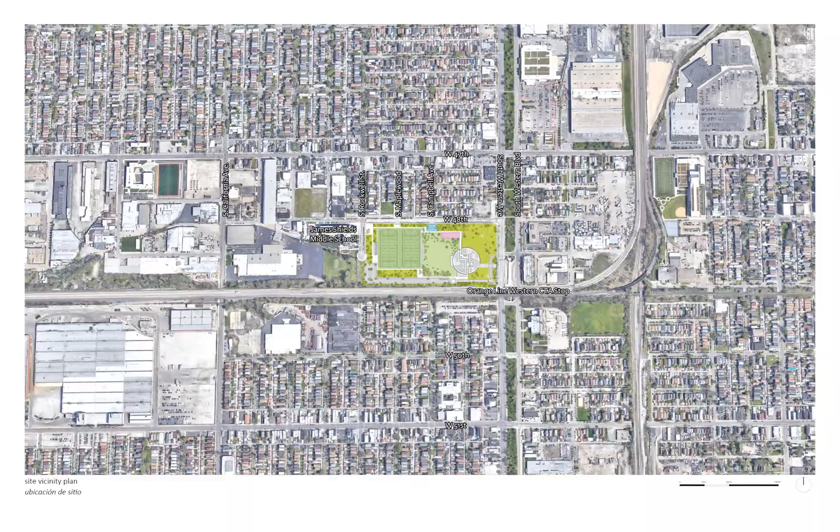Currently, the Brighton Park community area is one of the top 5 community areas underserved by public open space. The new park repurposes a 17-acre vacant former industrial site into a new community open space. The large site makes it possible to provide significant indoor and outdoor recreation assets for people of all ages and abilities.

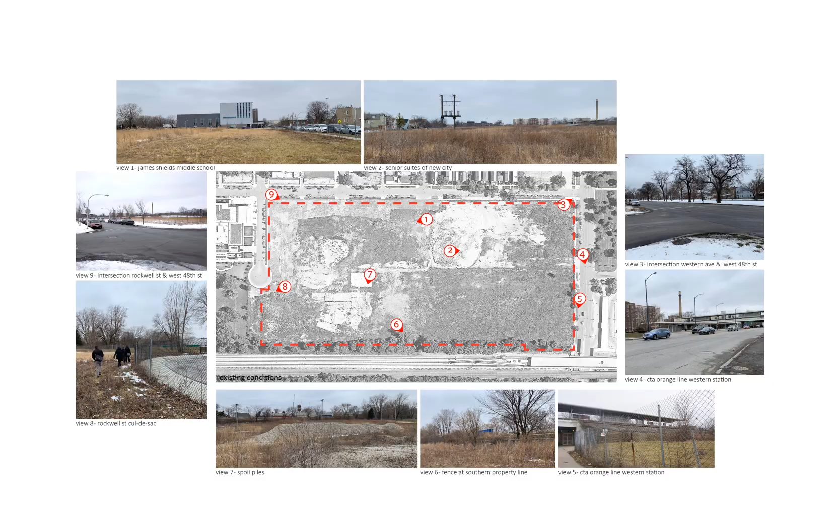Park 596 is located along the Chicago Park and Boulevard system, a network of major parks connected by green boulevards. Our site is marked here in red, positioned along a segment of the Western Avenue Boulevard between McKinley Park to the north and Gage Park to the south.

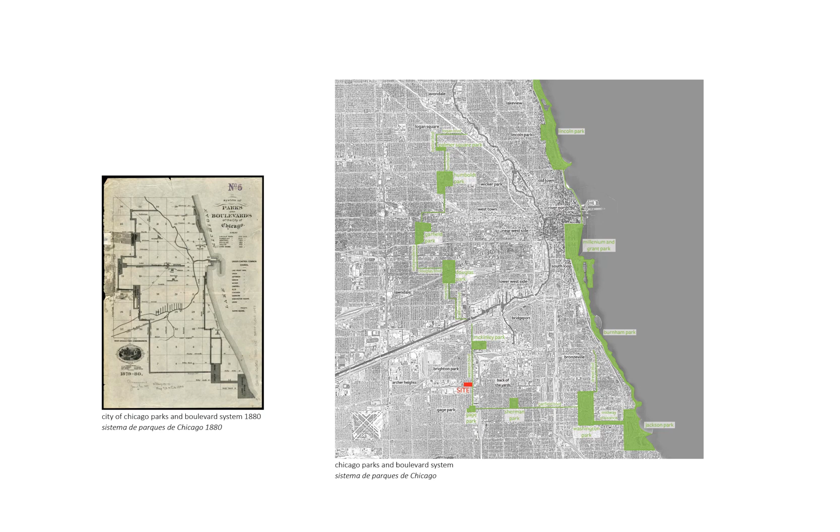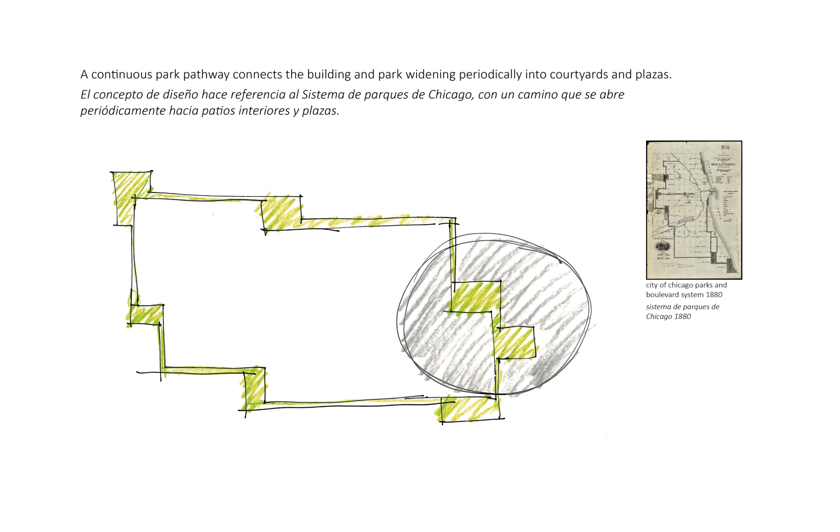The design concept for the park references the Chicago Park and Boulevard system, with a continuous park pathway that widens out periodically into courtyards and plazas.

This is the proposed site plan. Pedestrians may enter the site from one of 5 plazas on the north and east sides of the park. The pathway that connects these plazas meanders through the park. Inside of this path are recreation areas, 2 artificial turf fields for soccer, football, and lacrosse, and a great lawn surrounded by trees. North of the great lawn are 3 recreation areas for children: a playground, a spray pool, and a nature play area. Outside of the pathway is a natural landscape of meadow and grasses with looping walking paths.

The building is located at the east side of the site. The park pathway extends through the building, separating the ground floor into fieldhouse and headquarters.

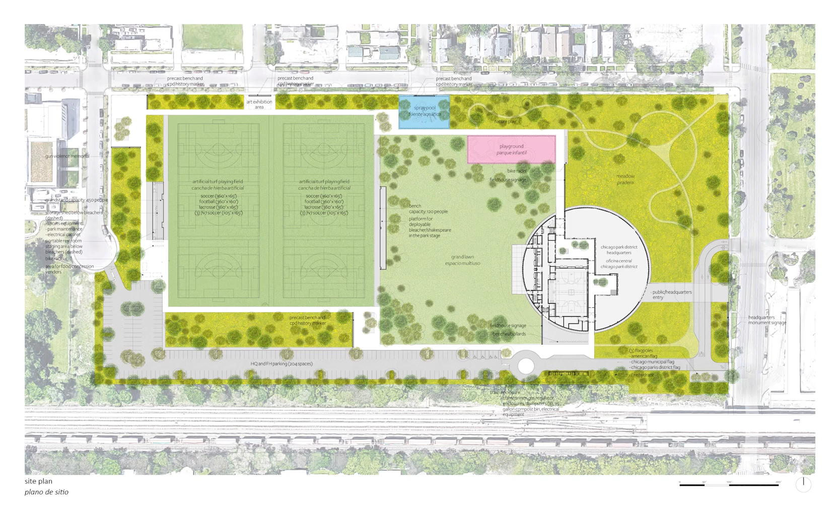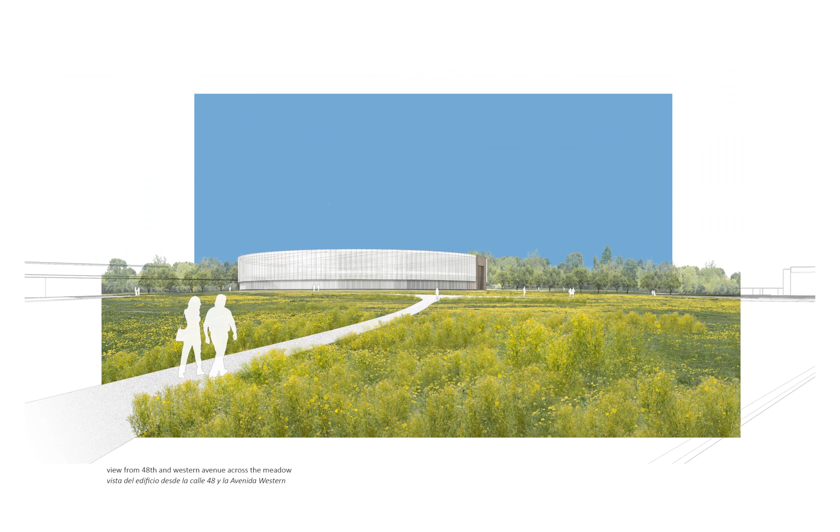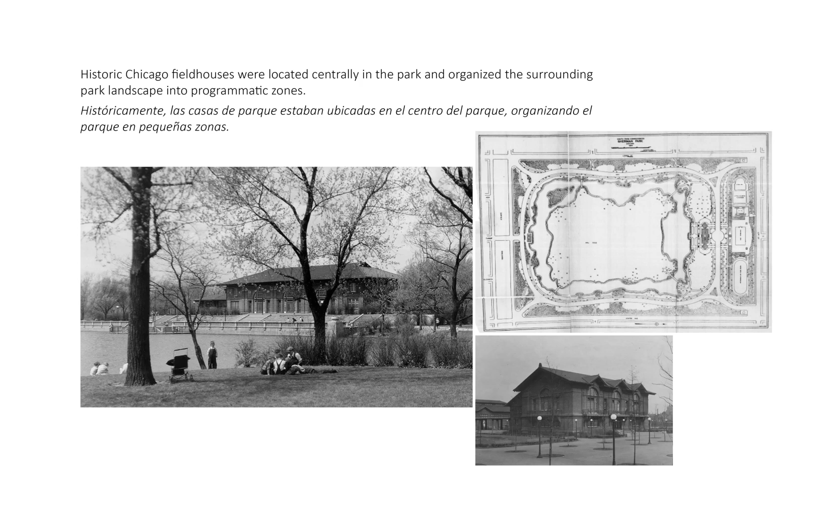The siting of the building is another reference to historic Chicago parks. In many major parks, fieldhouses are located centrally in the park, helping to organize the surrounding park landscape into programmatic zones.

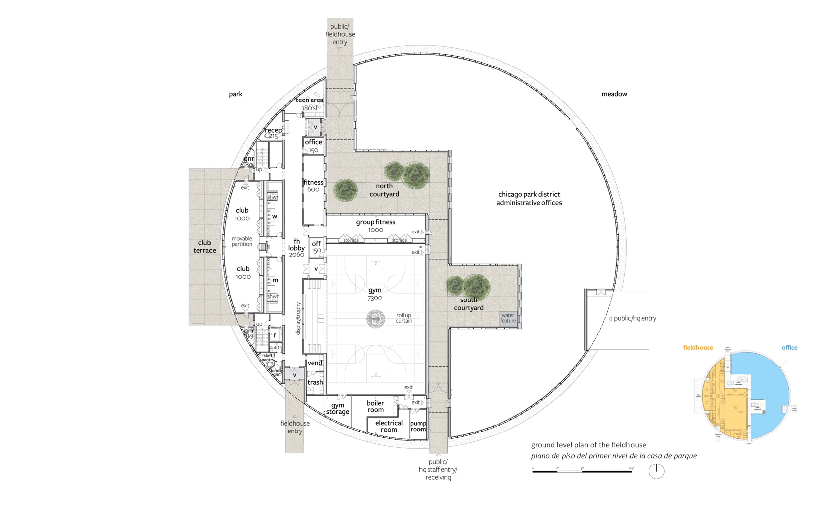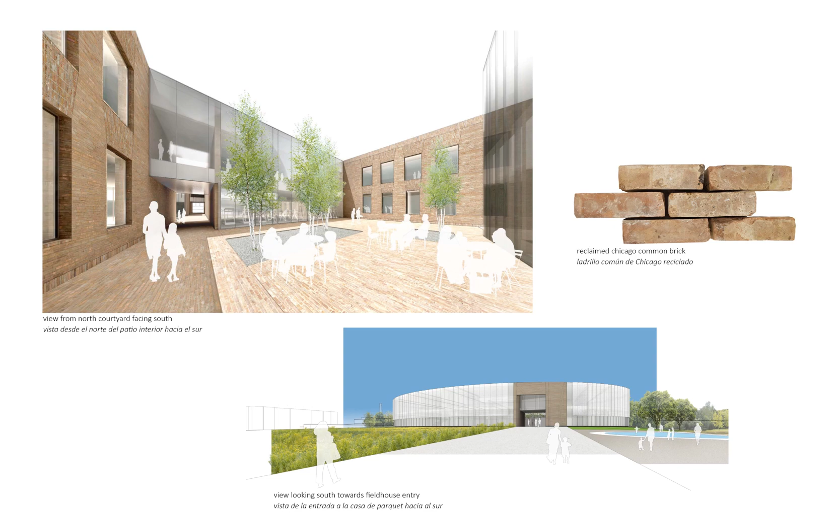This is a view of one of the courtyards, which serve as outdoor meeting and relaxation areas, as well as light wells to bring daylight into the center of the building. The walls of the courtyard are made of Chicago common brick to root the design in local culture.

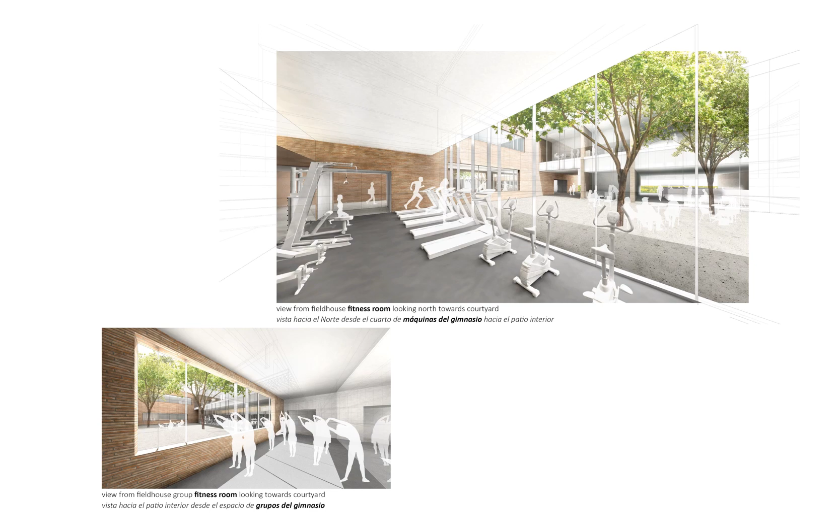The fitness area is comprised of 2 rooms, one for fitness machines and the other for group exercise. Both have views into the courtyard. The club room may be divided into 2 smaller rooms, each with a view of the great lawn.

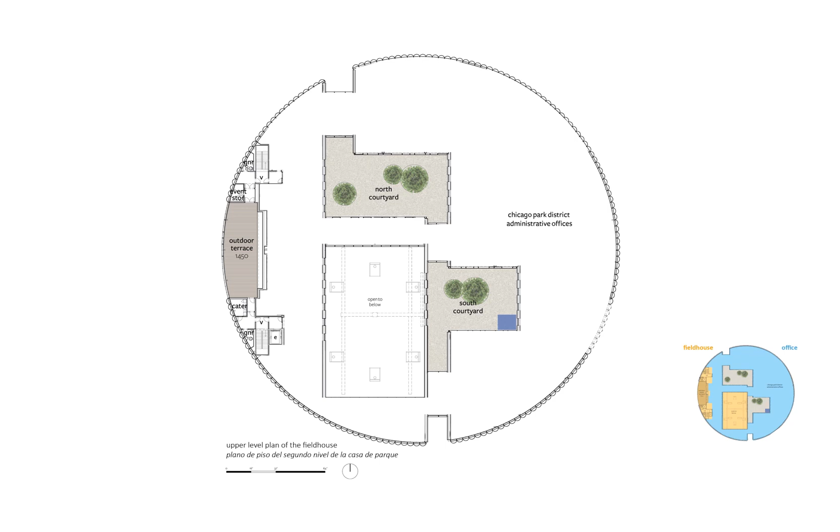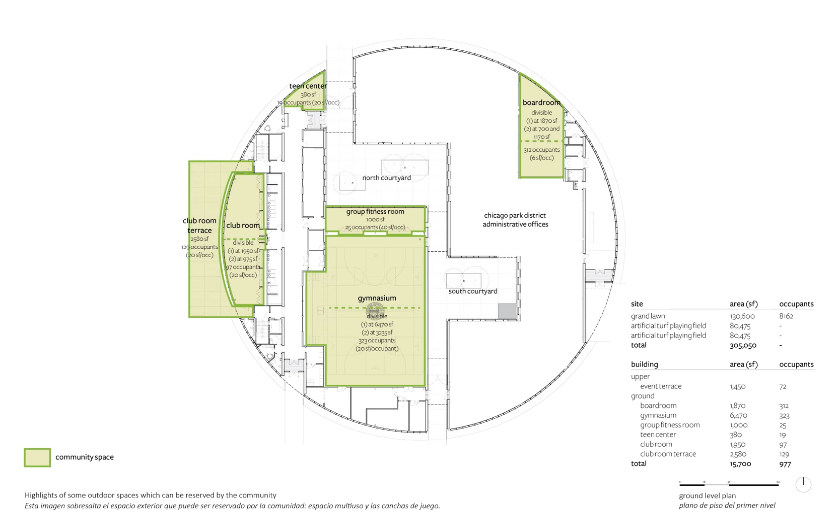The provision of community space is a priority for this project. This slide highlights community spaces within the new building. Many of these spaces are available for reservation by the public for parties, meetings, or events. Community spaces within the building include the fieldhouse club rooms and adjoining terrace, the teen center, the group fitness room, the gym, the boardroom of the administrative headquarters building, and the covered outdoor event terrace on the second level.

This slide highlights some of the outdoor spaces which may be reserved by the community: the playing fields and the grand lawn. The grand lawn serves as an open field for passive and active recreation activities, but also supports park district and community events. Events such as markets, art fairs, movies in the park, or performance events like Shakespeare in the Park will contribute to an active and vibrant atmosphere in the park throughout the year.

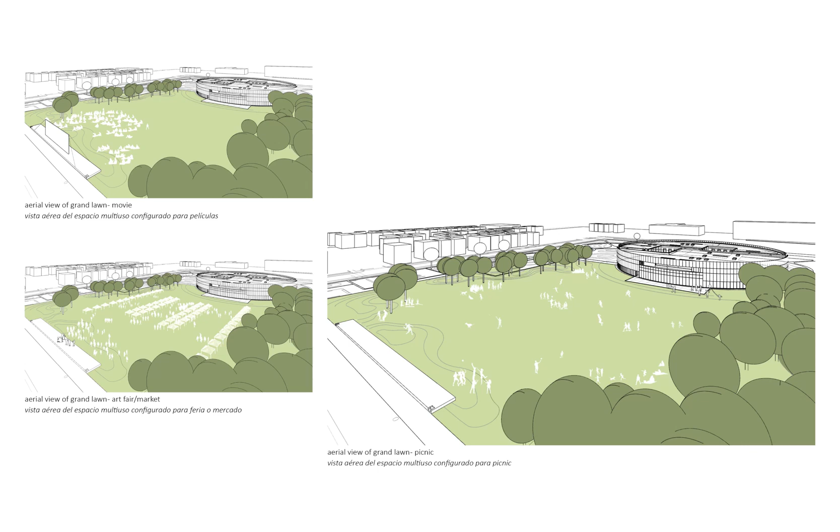This concludes the introductory presentation of the Chicago Park District's plan for Park 596, a new park, fieldhouse, and administrative headquarters in Chicago's Brighton Park community.